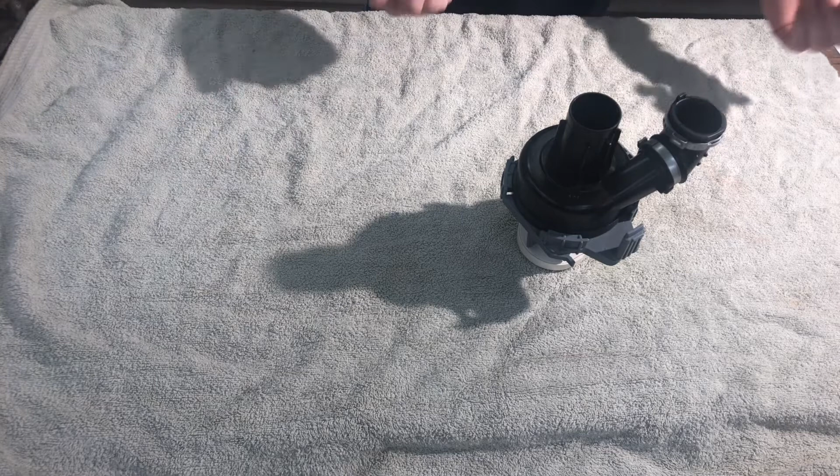All right, so for the first step, since I'm not going to recommend necessarily people go back to the first video and then watch the second one and come to the third one, if you end up here on part 3, it's fine. You're not going to miss anything. It's like Halloween part 3 with the weird silver shamrock crap.

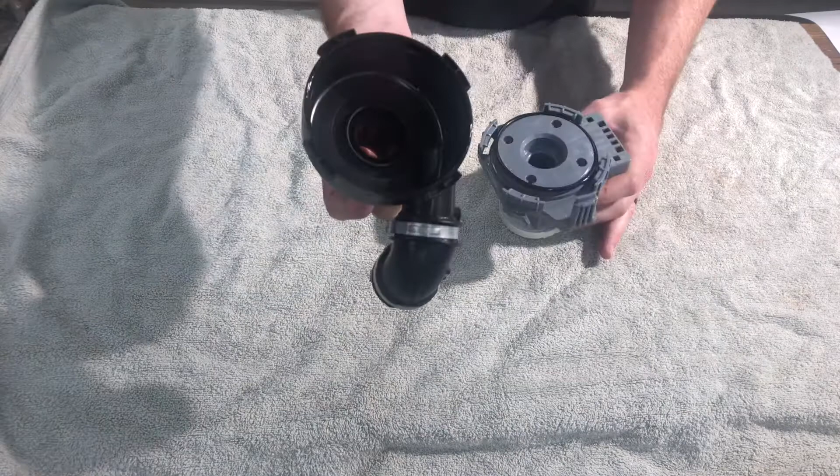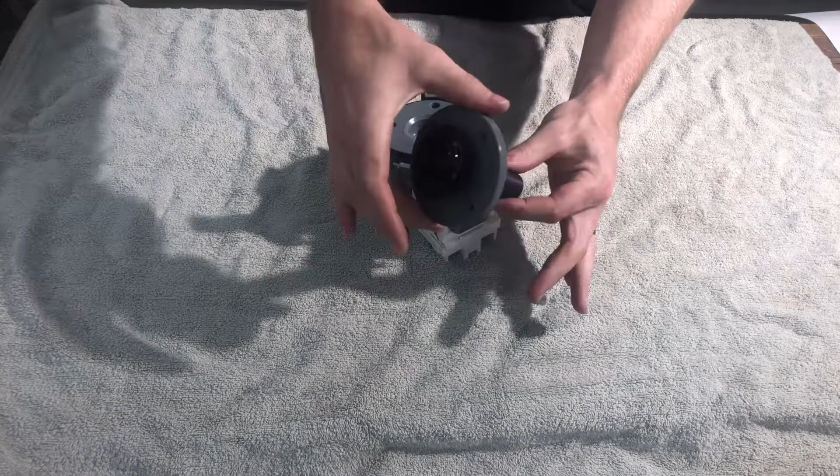So what you do, this comes apart just with a little quarter turn. I like to put a little scratch mark here and here, or you could do a Sharpie or something, just so you know which way to line it back up, because every time I forget. So then once in there, you're going to see this. You want to take out these 4 Phillips screws, and then when you pull it out, you're going to have this. This impeller just unscrews, lefty-loosey, and there's all your pieces.

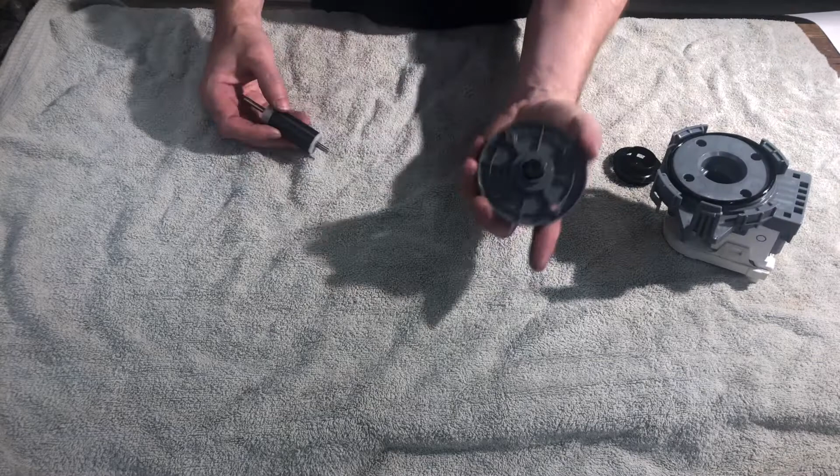Now you still have a bushing stuck down in here. I showed how I got it out the last time. I'll show that again. All right, so now the bushings are held in there fairly tight. All I do is I just use the end of the motor and just kind of push it out like that. Now it has an O-ring around the base. As far as I can tell, the O-ring has no purpose other than to retain this. It doesn't have any sealing purpose.

So let me pull out my measurements, discuss this real quickly. This is the factory bushing right here. Real simple measurements if you wanted to try to make one. I've now heard there's 3D printer files. People have been making them that way. If you wanted to make one, machine it, do whatever, draw it up. It's 5mm, 5mm. 10mm OD here, 13.5 OD here, and a 5mm through hole.

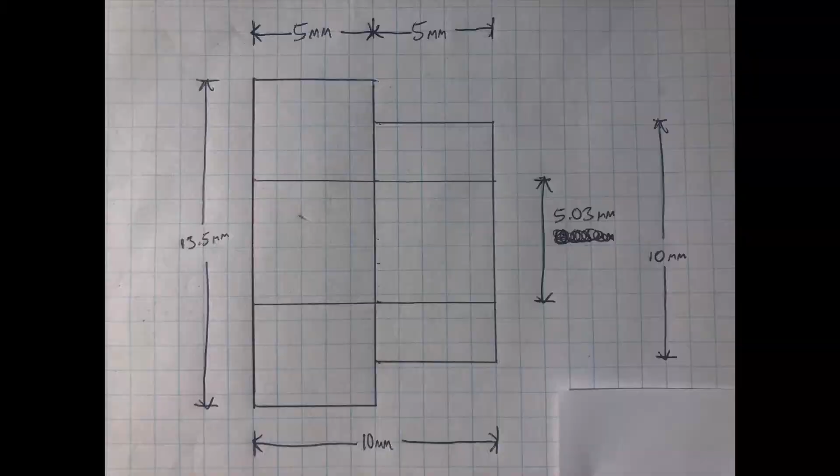Part of the reason I got so confused the last time is because I forgot that I'm in just about the only country in the world that's dumb enough to use the imperial system of measurement instead of metric system.

Once I got out a metric micrometer, it made so much more sense. It was like 5, 5, 10, 5, 13.5. There are a few options for replacement bearings.

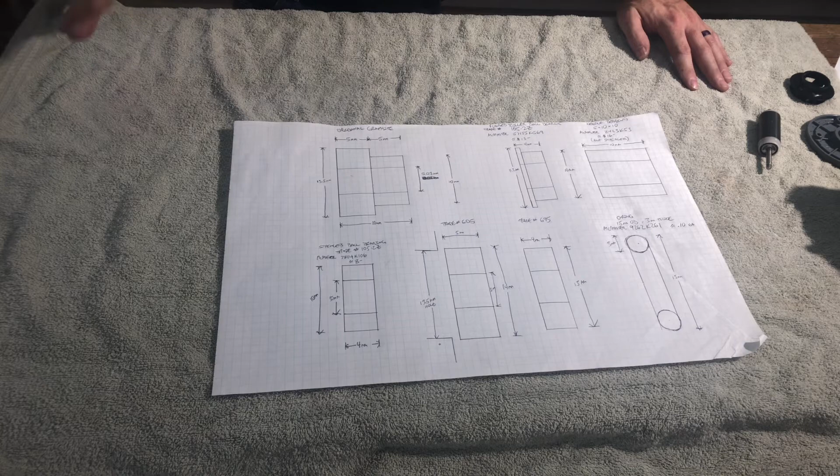The one I purchased, I don't have drawn on here because, as you know, it needed some tubing to take up the space and needed drilling out of the plastic. I know most people don't have a selection of large drill bits and aquarium tubing, so I'm trying to come up with a way to make this more robust that anybody can do just by ordering a few parts.

If I'm using McMaster as a guide, they have some 10mm bearings, both flanged and unflanged, and that will fit down into this small diameter right here.

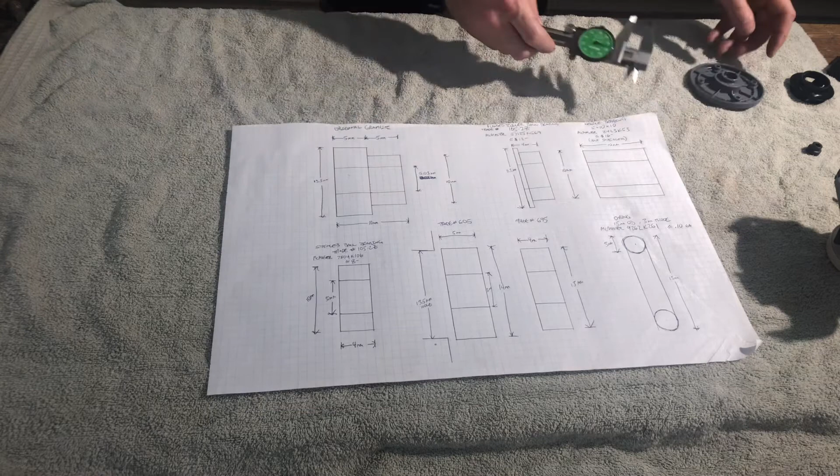Okay, so if you measure the inside of here, you get about 475 thousandths or so. That converts to about 12 mil, and this, remember, is only 10 mil. You might be wondering, how does that stay? That's what the O-ring's for.

So anyway, as you can see, it's a 10mm bearing. There's a 10mm roller bearing, and there's this 10mm bearing without a flange. All of those are going to be so loose and sloppy in there that I don't recommend doing that.

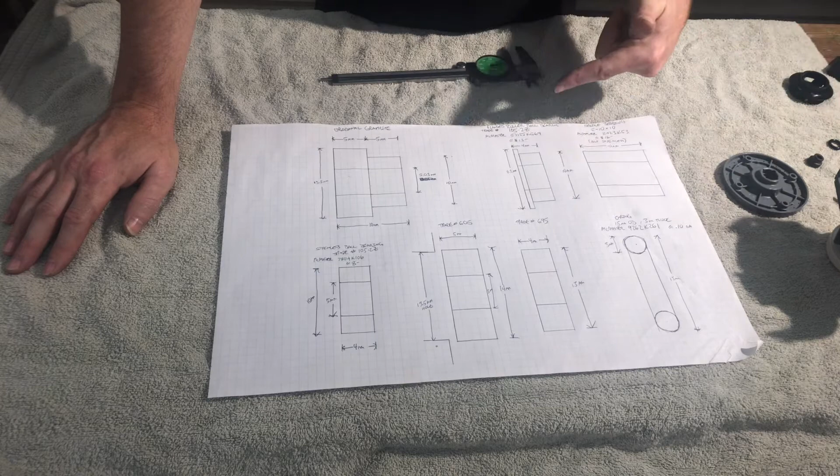Now that was originally what I thought was like the silver bullet - like, oh, all you gotta do, now that I know the metric dimensions, is get a metric bearing and pop it in there. But I think that's going to be pretty small.

So you go out to this bigger diameter, which on here is 13.5mm. You can't get a 13.5mm bearing, but you can get 14. You measure the inside diameter of that, it's 14.2mm.

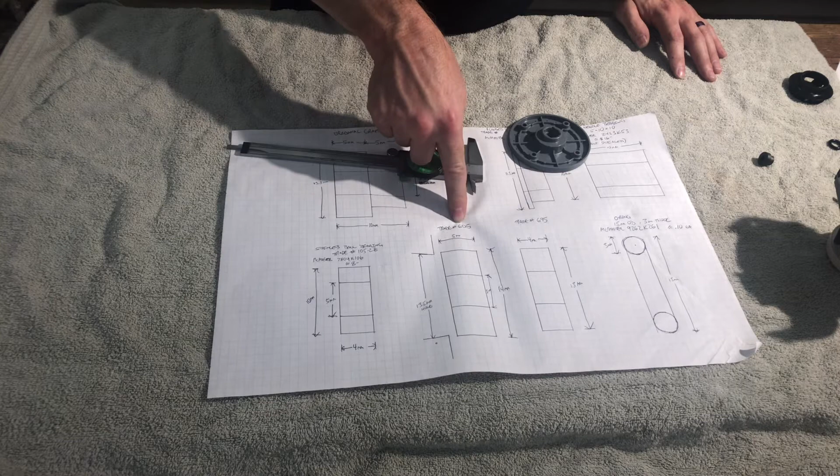So there's going to be a little slop, but that is what I've decided to order. You also gain the benefit of getting an extra millimeter wide. So I have ordered some of these - that is trade number 605. It is going to fit in this larger diameter, and there's going to be a little slop, so I might have to entertain the idea of putting a piece of heat shrink tubing around it.

The bearings I've ordered a few to look at. Turns out they're really cheap and really easy to find because these are all common sizes for radio controlled cars.

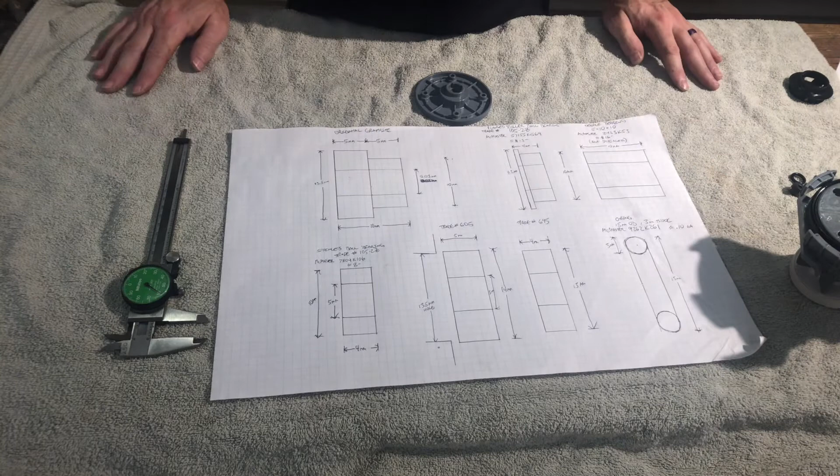So that's basically where I'm going to leave things today. As of now, I got a $50 replacement pump, I'll get a couple 605 bearings, and slap it back together, and hopefully it'll last way more than these graphite bushings, even brand new. I don't even think it's worth putting them in there, because all they're going to do is wear out and leave me disappointed at the worst possible time.

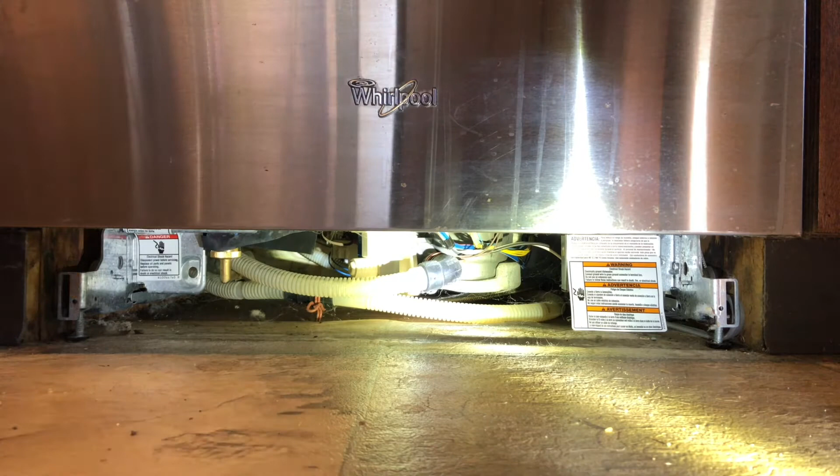I've got the cover off, and now I've got a little pry bar. You could do this with a broom handle or about anything. But the recirculation pump, I don't know if you can see it, but it's back there. So what I'm going to do is just try to bump it with this.

So we know it's those bearings going out again. So now that the dishwasher's running, I'm going to have some coffee, and then we'll go out to the shop and I'll show you how we fix it this time.

So the dishwasher made it through that cycle. I unloaded the dishes, I'm going to run them again, but I just want to show how I get this thing pulled out, flip it over, and take the pump out.

So I'm not going to get too specific on the process of pulling out the dishwasher because it's different in every house depending who installed it. In my case, since I installed this one, I made it easy - I just have a power cord that plugs in, a flexible hose that screws in, and then the drain hose.

A lot of houses have a rigid copper line going to it, or that flexible copper. I hate that. For a while I was installing dishwashers for Best Buy - probably installed 200 of them - and every single time I'd cut that copper off and install a flexible hose so you could do this instead of laying on your back, turning a wrench, loosening it a tiny bit at a time, and then dripping water. If you're gonna put in a dishwasher, do it this way.

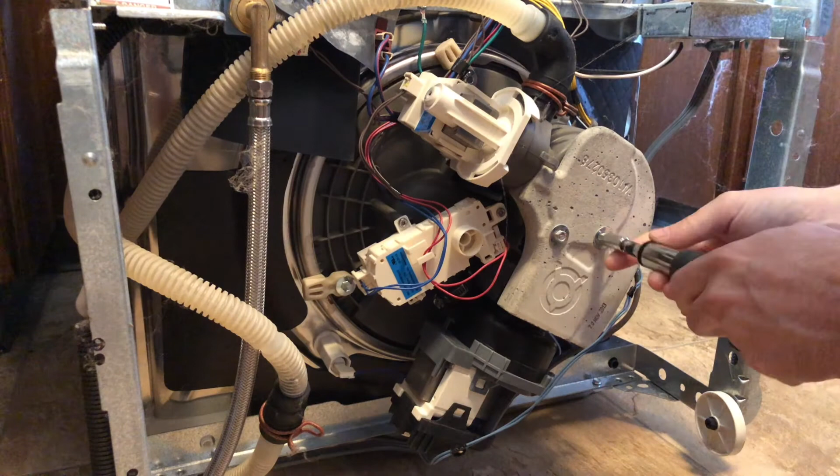This might be metric, but 5/16 works. And this hose clamp, depending if you've had it off or someone else has had it off, this might be the kind where you have to squeeze it, or it might even be the kind that's crimped on. You just kind of do whatever you have to do. And oh yeah, when you unhook that, it's going to start dripping.

There she is - probably the most famous dishwasher pump in the world.

All right, we're back. I've got old pump, I've got new pump. Let's get into this. Okay, so here's the old pump. I think I already know what failed. So I had people in the early videos saying that the plastic bearing was a dumb idea because it would fall apart. I thought they were wrong, and I still think I did pretty well. It's been over 3 years, which is longer than the factory one lasted. I don't know at what point you declare complete success, but we beat the OEM.

Yep, my bearing fell apart. Let me go hose this off, I'll be right back. All right, there's what happened. Honestly, if I didn't lose one of these bearings when I took it apart, you could totally just snap it back together and put it back in and it would probably work again. But I have a new solution, so that's what we're gonna look into today.

So first thing I want to mention, I don't see any difference between these two. If you can get 3 of these for the price of 1 of these, it certainly doesn't look 3 times as crappy. So let's see how my bronze bushing held up.

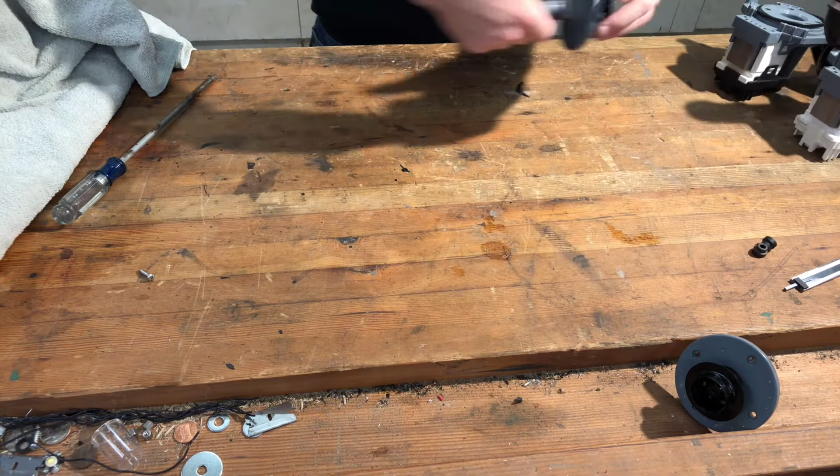Remember, this has been in for 2 years and some. Oh boy, that's what's left of my bronze bushing. Totally just ate the whole thing. I mean, granted, it lasted longer than the graphite version, but man, it sure ate it.

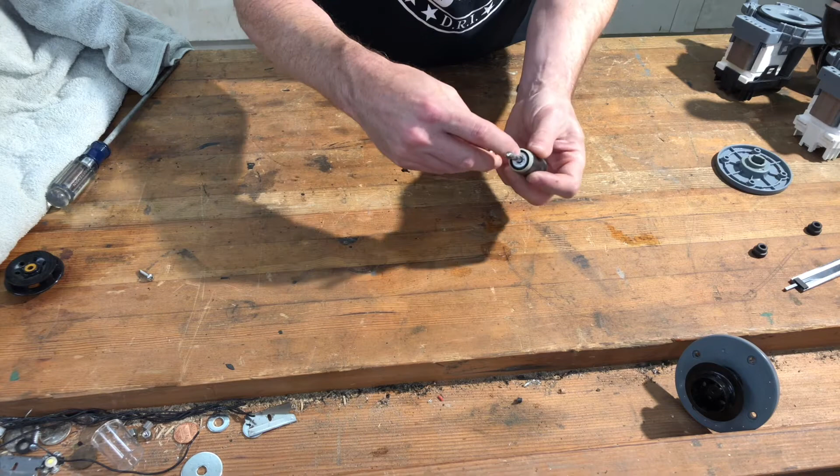I honestly didn't think that would happen, but that explains why the ball bearing one fell apart. This is made to just ride on the bushing, which in the case of the original would have been graphite, and it's made to run up against that. Since I did the bronze one, it was still doing the same thing, but apparently this was a little bit more abrasive on the bronze than it was on the graphite. Once that started to wear away and this was able to migrate farther and farther up, it just pulled that bearing apart.

Maybe they weren't so crazy with the graphite. I mean, yeah, it wore out really fast, but man, it didn't get eaten like the bronze did. And normally when you'd use a bronze bushing, Oilite or otherwise, you'd put some lubrication on there, and this is constantly underwater, so maybe that's why.

Yeah, and I said I was going to show how to get that bearing out of the bottom. There we go.

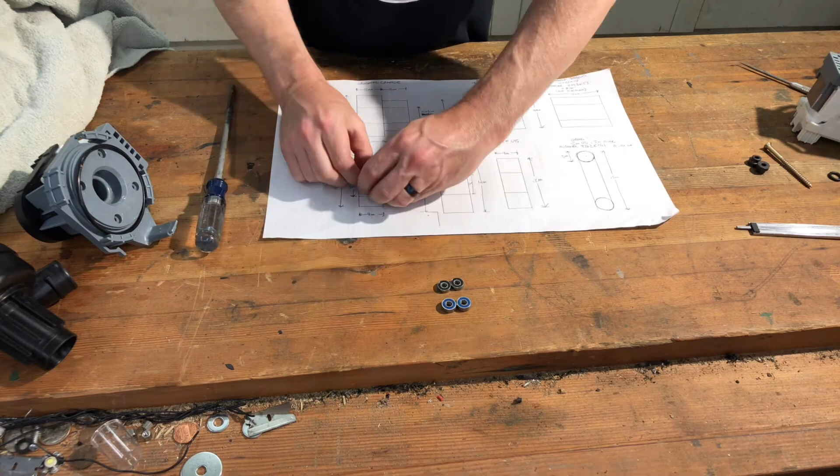All right, let's talk new bearings. I'm not going to go into the brands that I purchased - you can get whatever brand you want. I found mine on eBay. Like I said, these are common for radio-controlled cars, so they're very affordable. These are the flanged ones, these are the unflanged ones, these are those, these are those - those are the originals. All right, so I was talking about how I thought these little ones would be the answer.

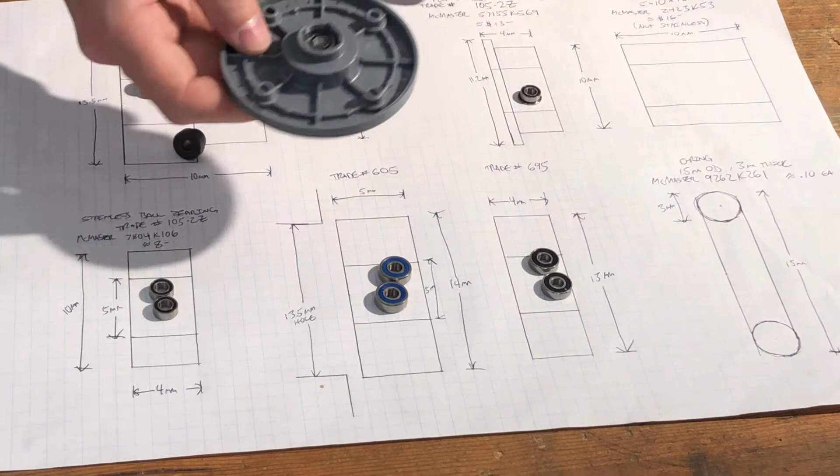Because they're the same size as that small diameter and they have a flange, so I figured they'd just snap right in. Problem is, as I described earlier, there's a lot of slop in there, so if I try to put that in there, it's just as loose. There's nothing to really hold it in. So then I have the same problem with those, obviously the same thing without the flange. But look how tiny that is - that's just, I feel like way too small in precision for a thing that's gonna be running at a high speed underwater every day or every other day.

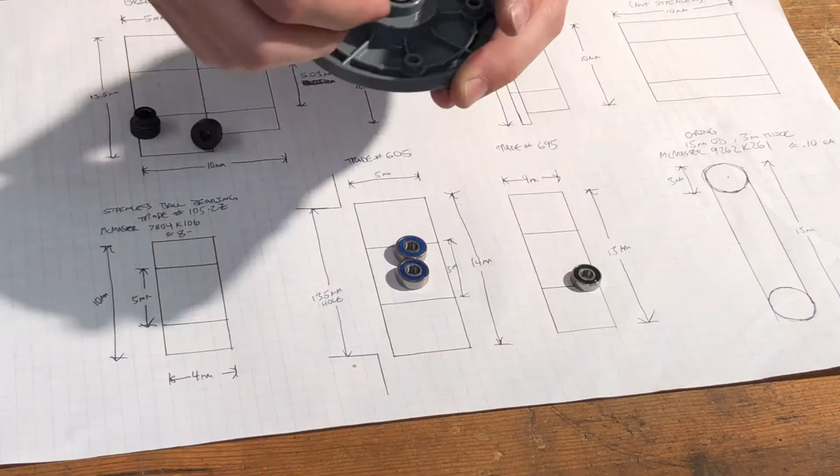So those are out. Next up were the 13 mil - these are slightly smaller than that OD, but again, same story. That leads us to the 605s. So the question is, how do you get that to fit nicely in there? And again, I'm trying to do this simply so that somebody without a whole workshop can do this.

Okay, I'm gonna try this. I got a little piece of heat shrink tubing. Okay, I cut that shrink tubing about 1 mil longer. Now I'm gonna shrink it down.

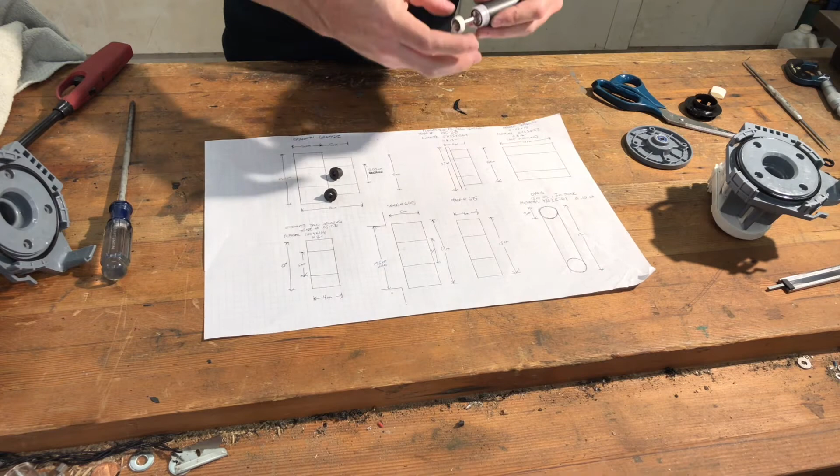Okay, so you see it's kind of wrapped over. Now I think if I put it in this way, it should go in. And I think I can use this as a press.

Yeah, that worked. One more thing though. Now I know how hard this rubs on the bushing, enough to completely wear away that bronze one. I feel like I want some sort of thrust washer in there. So I'm gonna think on that.

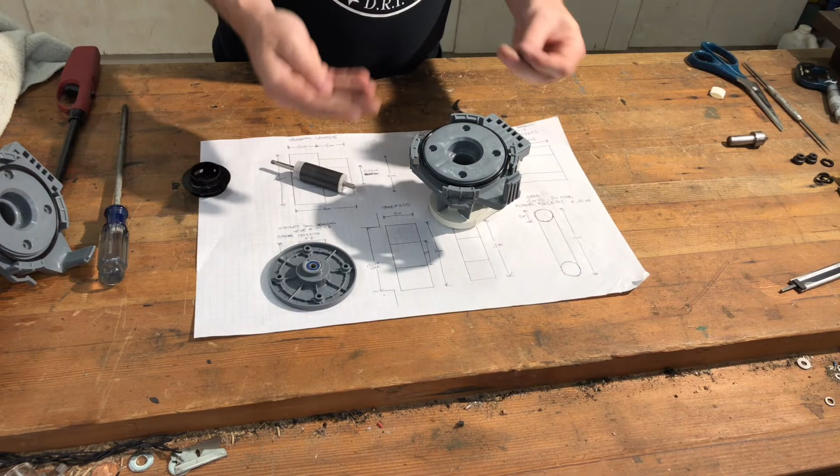I'll bring it back. All right, I didn't have the right size washers, so I made them. It's the benefits of having a machine shop at your house. Since most people don't have that, I will provide the dimensions of these washers in the description.

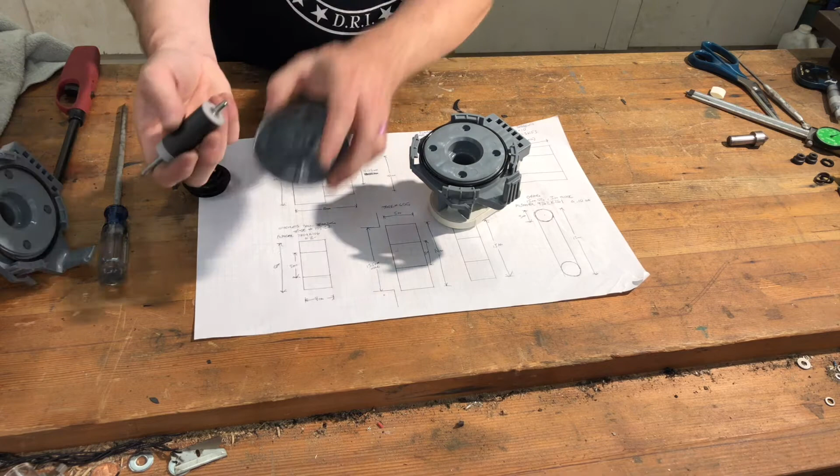And the reason I think these are gonna be nice is because it will space them off the bearing a little bit and make them thrust against the center race instead of out here or on the shield or something else. Okay, and you want to give the impeller a good tightening before you put it in, because once you put this in, then you won't be able to tighten that back on. You want to make sure your washer stays on.

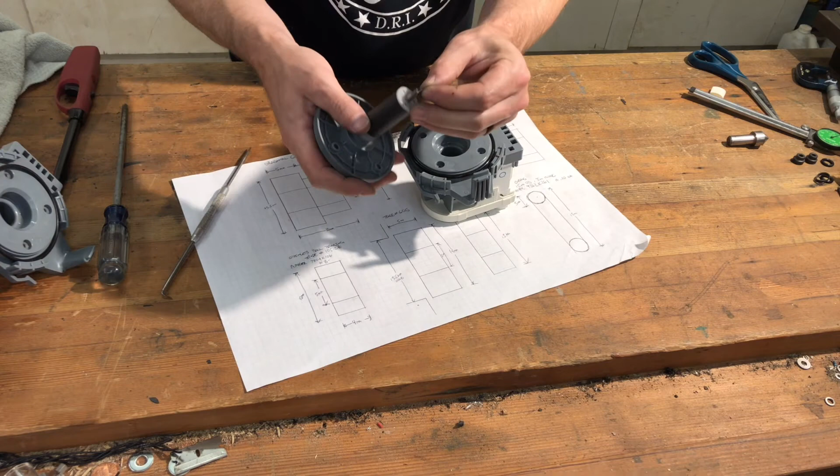This is magnetic, but the washers are stainless, so it's probably easier to just bring the motor to the middle. And don't put the O-rings back in. They are no longer needed.

So now that does have the ability to move a little bit, but it's captured between those two washers. So hopefully either way it decides to slide, it will be just turning against the bearing and not wearing on anything else. The one thing that will be interesting to see, and I'll continue to update in the description of this video, longevity. These are ceramic ball bearings, so the balls will not rust.

These are lubricated inside and have rubber shields to keep stuff out. Now, anytime you have something underwater, whether it's sealed or not, water will probably find a way in. Hopefully, as long as most of the lubrication stays in there and no actual bits of food particles get into that bearing, hopefully it should continue to run. I guess back into the house, put it back together.

All right, so in summation, what did we learn? Graphite bushings that come with it last about 2 years maybe. The ball bearing that I threw together in part 1 of this seems to hold up just fine. It failed this time, but it wasn't the reason it failed.